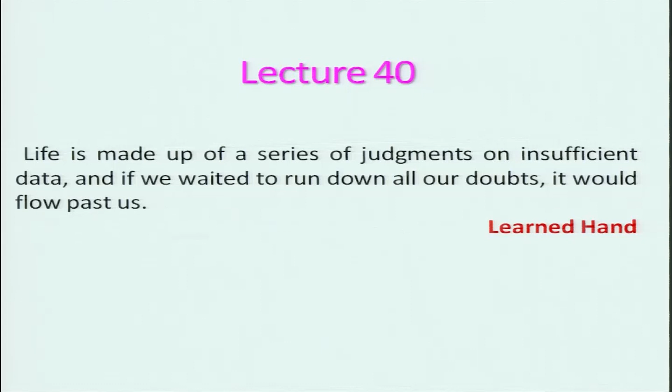So in the last lecture, we basically looked at the governing equations for laminar and two-dimensional unsteady flow, later steady flow, and we looked briefly about boundary layer, though we may not use it much in this course, but you should have some feeling for it. Very importantly, we derived the one-dimensional governing equation for mixture fraction, which is basically a conservative scalar.

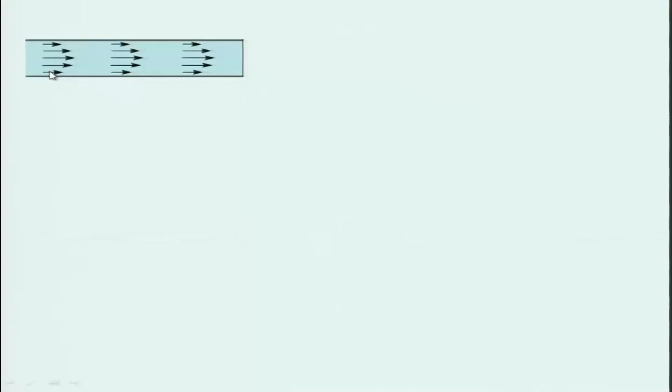These equations are valid basically for laminar flow, and keep in mind we will also have to deal with turbulent flow. Laminar flow means the flow will be layer by layer. If you look at flow through a pipe, it is layer by layer, meaning there will not be any mixing across it. Whereas in turbulent flow, it will not be layer by layer, it will be intermingling with each other.

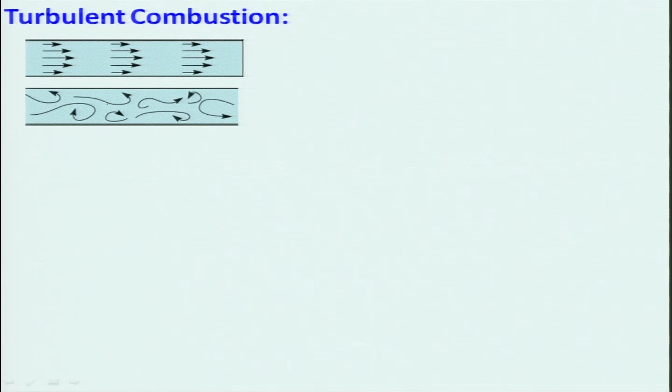So therefore we need to look at that, and turbulent combustion plays a very important role. Why? Because most combustion devices are basically turbulent in nature, except for a few exceptional cases.

For example, if you consider your LPG burner, is it laminar or turbulent combustion? It looks to be laminar. But if you look at a candle light, is it laminar, turbulent, or transition? What would it be? It will not be laminar, it will basically be transition.

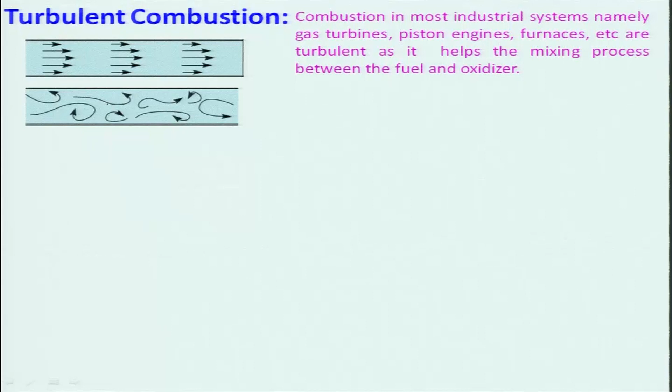But most combustion systems in industries, namely gas turbines, piston engines, furnaces, etc., are turbulent, and it helps in the mixing process between fuel and oxidizer. Why go for turbulent? Not only the mixing, we want a high rate of heat release, meaning mixing should be as fast as possible. Therefore we need to go for turbulent combustion.

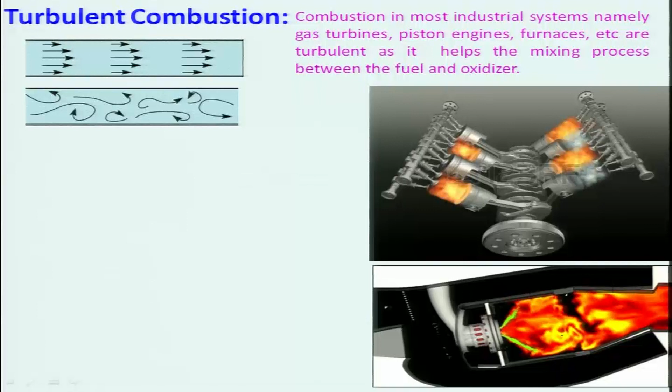If you look at this internal combustion engine, this is the combustion taking place, and it is intensely mixed, meaning the combustion will be turbulent. This is your gas turbine combustor, where a lot of mixing is going on, and there is also some injected fluid like secondary airflow coming in.

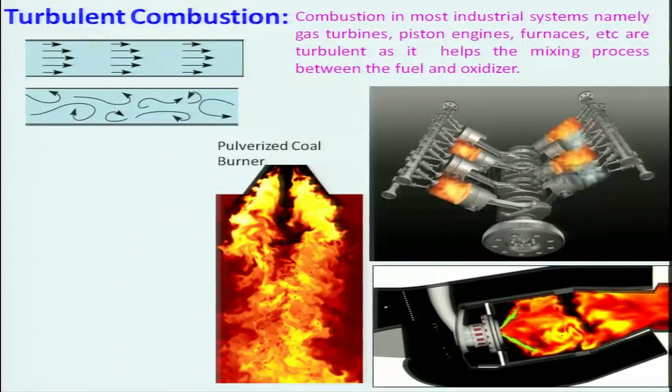Let us look at coal combustion, which is pulverized. Pulverized means particles, and combustion is taking place here. What you could observe is the characteristic feature of turbulent combustion.

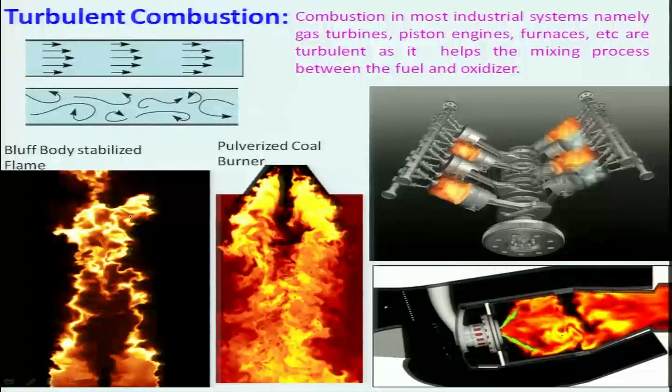What I will do is only touch upon certain terminologies we may use. I will not get into detail on that.

Can we define turbulent flow the way we define laminar flow? How do we do it? There will be some characteristics - the flow will be layer by layer, and then we can say whether it is laminar or turbulent. But can we actually define turbulent flow?

We use viscosity, diffusivity, mass diffusivity or molecular diffusivity, and other properties of the fluid. If I say it is air, the viscosity will be different; if I say water, it will be different. But can we define turbulent flow? You cannot really define turbulent flow - you will have to describe turbulent flow.

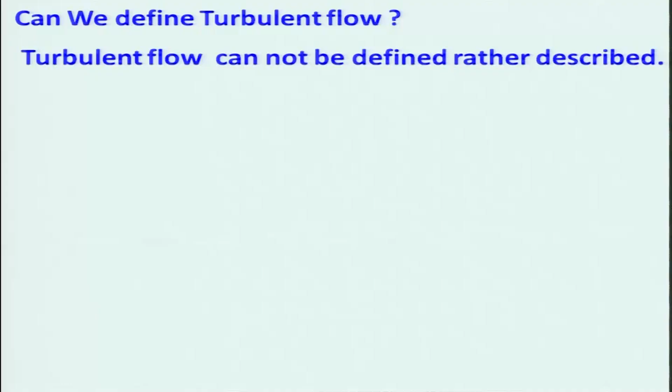And now, how will we describe the turbulent flow? That means we will have to use some characteristics. What are those characteristics? Any idea?

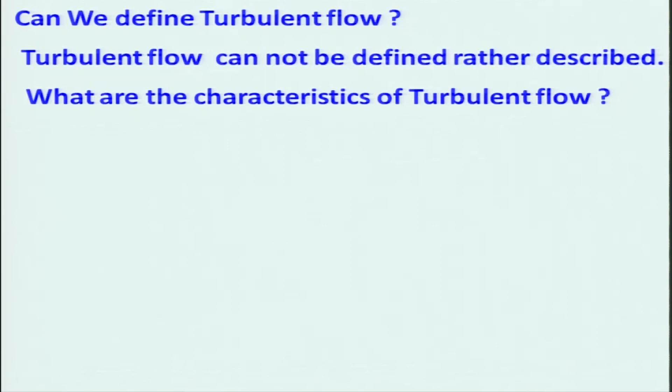It will be irregular, right? The flow will be convoluted, it will be mixing, that means there will be intermingling of the fluid element or the blob which will be taking place, right? The molecules will be moving here and there, and some fluid packets will be moving up and down in the adjacent layer.

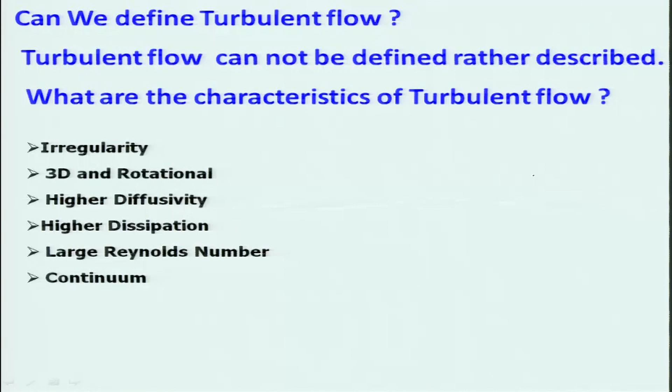And as a result, if I consider a jet, let us say, this is my air jet and there is a flame here. If it is laminar, my flame will be looking like that, some particular shape. But if it is turbulent, it will be like that, intermingling surfaces, and each one of these is an instantaneous contour.

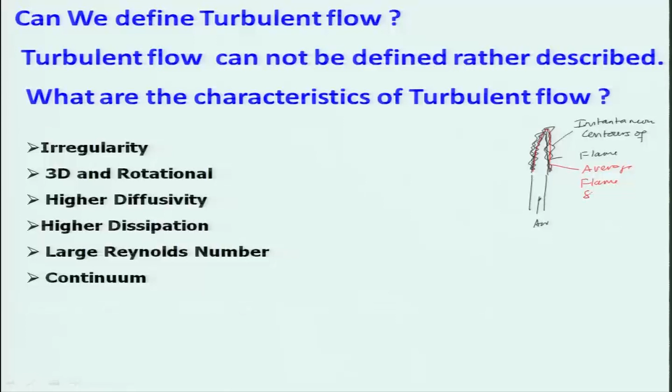Contours of flame. So this will be my average flame surface, right, and these will be very irregular in nature. But if you say, look, I have taken a photograph of the flame and it looks to be very smooth, it is not, because it will be averaging out, you will not see it unless it is highly turbulent.

And this flow will be 3-dimensional in nature. You cannot say I will consider 2D. It will be 3-dimensional and rotational. Rotational means the fluid will be rotating, in the sense, rotational flow - like inviscid flow, is it rotational or irrotational? That will be irrotational, right. But here it will be rotational.

You cannot really consider inviscid, then turbulent. Can you consider? No, no. So as a result, there will be higher diffusivity. What do you mean by that? We have seen various diffusivities like conductivity, thermal conductivity, molecular diffusivity, and viscosity. These are all diffusive processes, diffusivities. So those will be much higher than the molecular one. It will be diffusing, moving around, intervening kind of things.

And of course, we always use a Reynolds number to say whether it is laminar, turbulent, or transition. That is, a high Reynolds number is generally known as the turbulent flow. As we had defined earlier, basically that is Reynolds number, rho V D by mu, if d is the diameter of the tube - this is your diameter, diameter of a tube - from which the flow is going out, both fuel and air mixture you can say.

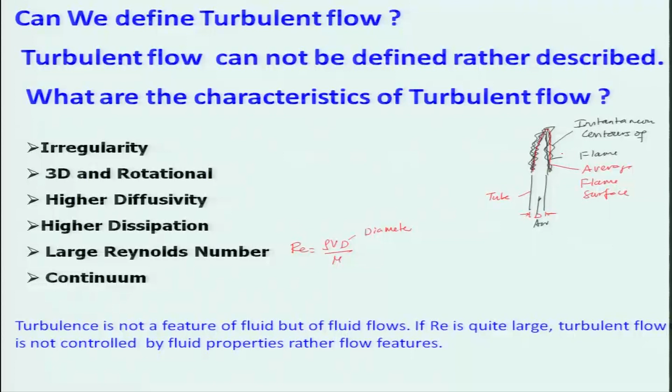Basically, as I told, turbulence is not a feature of the fluid. I have already told, like diffusivity, molecular diffusivity, conductivity, and viscosity - these are all properties of fluid, not properties of the flow. And keep in mind that if the Reynolds number is quite large, not in the transition regime, the turbulent flow is not controlled by the fluid properties, rather by flow features. It will be how the flow is.

And now we will be looking at how we will take care of some of the terminology. I will be talking about it. So, at high Reynolds number, properties like velocities, temperature, and mass fraction exhibit random variations. Now, how will we deal with it?

Because if it is varying randomly, we will have to use some statistical tools or make some average quantities. Keep in mind that eddies move randomly back and forth across the adjacent layer. Let us say there is a bulk fluid which is moving, but in between the fluid elements will also be moving, unlike in laminar flow where the flow moves very nicely.

If you look at turbulent flow, you can look at the traffic in Kalyanpur, Kanpur. All these cars will not be in a lane, they will not be following lane, they will be moving here and there the way they want. But if you go to a western country, the cars will be moving in their own path. So it will be laminar, but here vehicles move here and there.

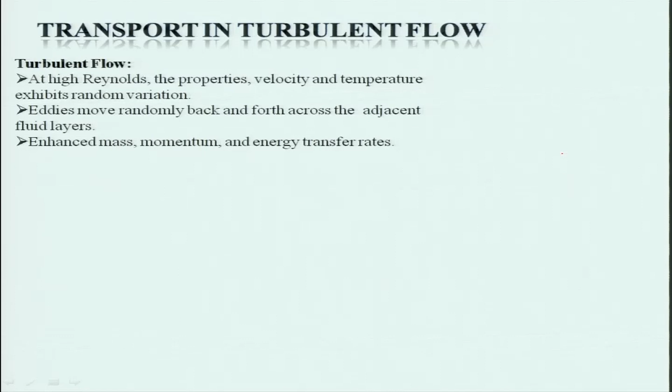So it will be losing a lot of energy, and it will also cause some problems. But as a result of this fluid moving in a turbulent or chaotic way, I can say all turbulent flow is chaotic, but all chaotic flow need not be turbulent. There will be enhancement of mass, momentum and energy transfer rates, and that is why it is being used.

Now let us look at a velocity profile, velocity fluctuation along with time, Vx. This is your average velocity Vx, and this is Vx at any instant of time. If I consider this as a straight line, at T naught, this will be Vx dash at T naught. At some other time instant it will be different. This is the fluctuating quantity, the maximum fluctuating quantity.

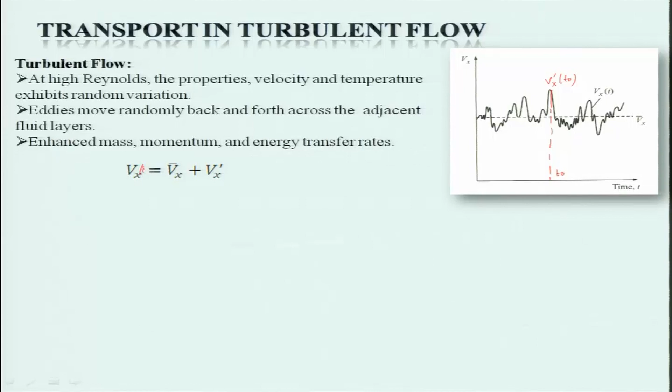That means I can write down Vx at any instant of time is equal to Vx bar, the average velocity along the x direction, plus the fluctuating quantity. So what is this average component?

That is nothing but 1 over delta t, integrated from T1 to T2, of Vx over time dt. If we integrate over a certain time, which is a very large time scale, not a very small one, and should not consider only a small portion but a considerable time, then this gives the average velocity, and of course there will be fluctuating quantities as well.

Similarly, I can also talk about pressure: Pt is equal to P plus P dash. And I can talk about temperature: T is equal to T average plus T dash. Similarly, mass fraction of species i would have its average plus a dash fluctuating term. This is basically known as Reynolds decomposition, having two components, one fluctuating, the other average quantities.

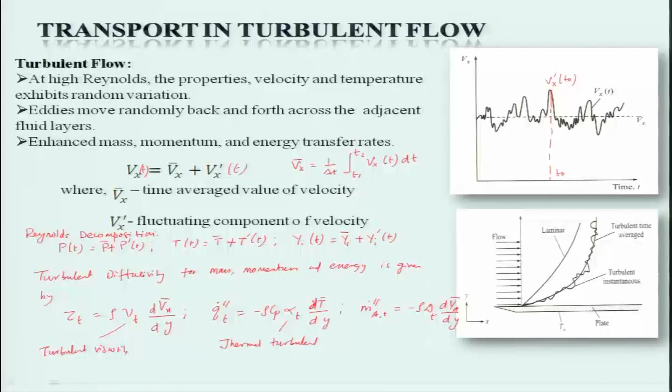And keep in mind that this thermal turbulent diffusivity, or turbulent viscosity, or this turbulent mass diffusivity, are properties of the flow that you will have to connect.

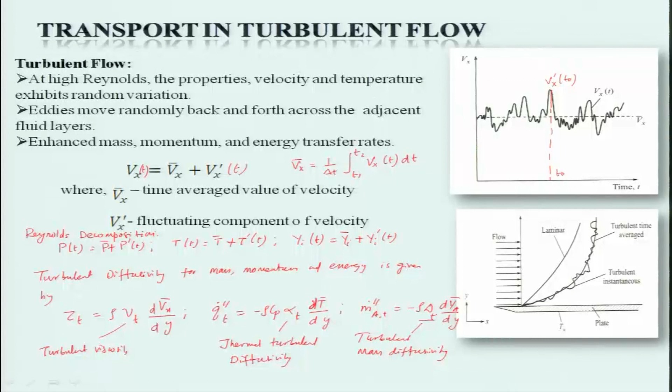We will not be considering this in detail, but let us look at how we can describe these properties using various terms. So turbulent flow can be characterized by two quantities: one is turbulent intensity, and another is the turbulent scale.

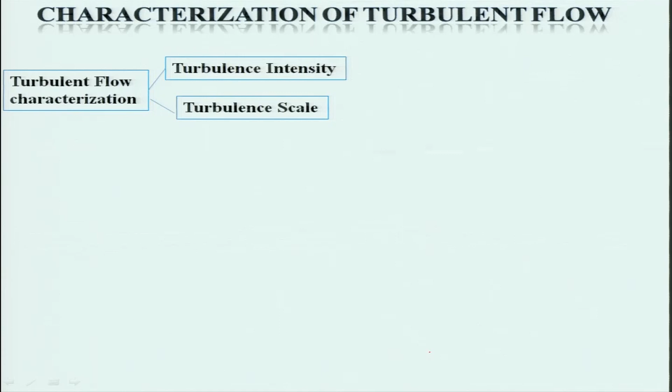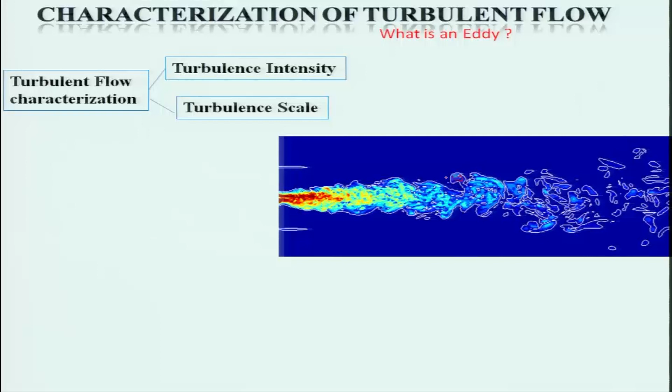So an eddy is considered to be a macroscopic fluid element comprising of smaller eddies as a single unit. That means there will be some small eddies which will be rotating as a unit.

For example, if you look at the various panths in Sanatan Dharma, let us say some group is talking about yoga, somebody is talking about bhakti. They are also having some kind of thing, they will be rotating, moving around it, but they will be similar in nature. So that we call it as eddies.

So that means some fluid element will be moving, let us say in this bulb, I can consider as this one, they will be moving, rotating, intermingling, intertwining, but they will be in a group doing this together, and that is known as an eddy.

And as I told, the vortex embedded in the flow, this is basically a vortex which is embedded in the flow. Vortex means which will be rotating.

And the intensity of the turbulence is basically a measure of the violence of eddies, how fast it is moving, so that energy is transferred. So that is known as turbulence intensity, and turbulent intensity will be dependent on what?

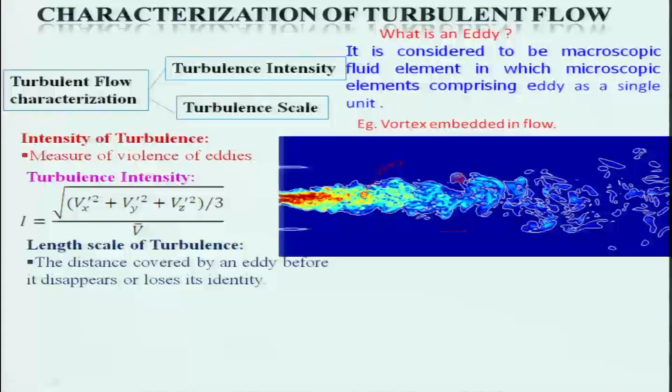Length scale is divided into basically four types. One is macroscopic length scale, which is the characteristic width of a flow. Let us say if it is a pipe flow, what would you use for the macroscopic scale for pipe flow? L will be basically d, the diameter of the pipe.

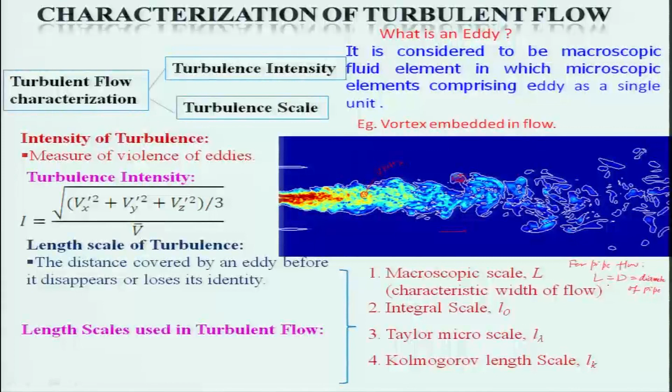And there is the integral scale L naught, and there is the Taylor microscale and Kolmogorov length scale. Keep in mind, mechanically we use this macroscopic scale for laminar flow, we always use rho V D by mu to find out Reynolds number. But in turbulent flow you will be using different scales to find out different kinds of Reynolds number.

Keep in mind that these scales will be changing, because the eddy's size will be changing, and the time and distance it will be moving before losing its identity will also change. So scale will be changing, and there is a cascading effect - larger scale eddies become smaller and smaller. The lowest one will be the Kolmogorov length scale, which is the dissipation scale, because it will be dissipated - the smallest scale is the Kolmogorov microscale.

Let us look at the integral scale. L naught, as I told you, is the integral scale, and this basically represents the distance between two points in a flow where correlation between the fluctuating velocities at two locations ceases - that means there will not be any correlation between them.

For example, if there is a fluid element having some velocity fluctuations, and there is another point at some distance, let's say distance r. This will be moving with velocity Vx dash at position 0, and this will be Vx dash at position r.

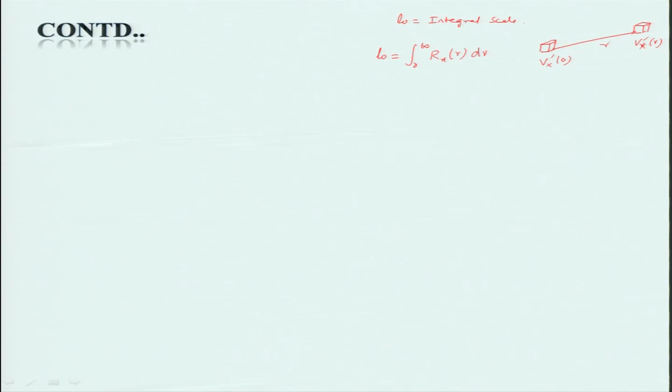That means there will be some correlation between the two, and that distance will tell you the integral scale. So L naught, the integral scale, can be written as the integral from 0 to infinity of Rx r dr, where Rx is the correlation coefficient.

As I told you, this is basically a function of the distance between which the velocity fluctuation loses its identity. So I can define Rx: it is Vx dash at time R equals 0 and Vx dash at R, averaged over both, divided by Vx RMS dash at 0 and Vx RMS dash at R. This is the correlation coefficient which you need to look at to define the integral length scale.

Similarly, in another way, we can talk about the Taylor microscale, L lambda, which is nothing but Vx dash RMS divided by the average of (dou Vx by dou x) squared, known as the mean strain rate - this divided gives you the Taylor microscale.

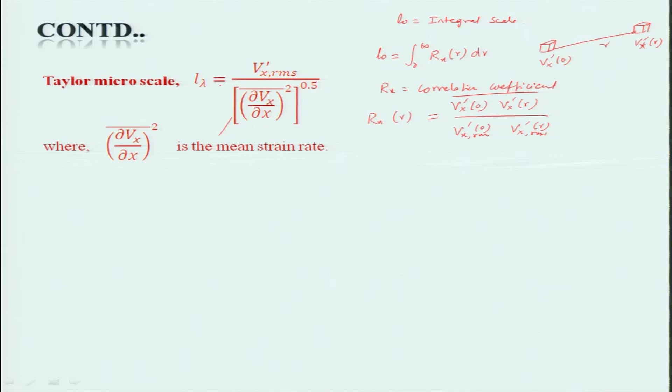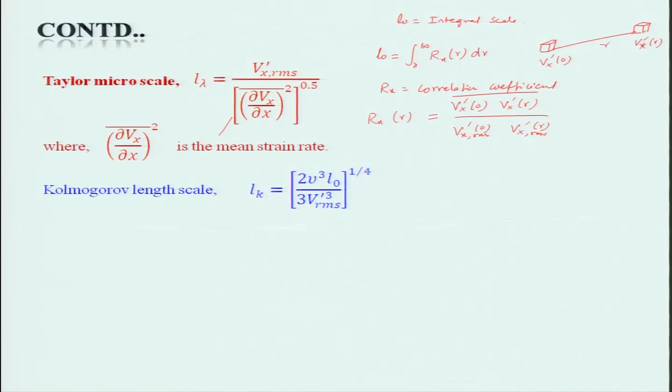And the Kolmogorov scale is given by 2 nu cubed L naught divided by 3 V RMS cubed, all to the power 1 by 4 - this comes from order of magnitude analysis, and is related to the integral length scale L naught and V RMS, where nu is the kinematic viscosity. And Lk, as I told, is the smallest vortex that could be present in the turbulent flow.

After that, what will happen? It will be dissipated - it will lose its identity altogether. That means all the energy carried by this vortex will be lost. These are all packets of energy carried by the vortex, which we call an eddy.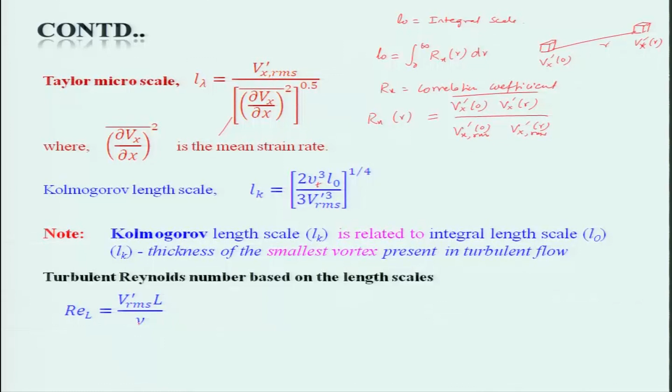Now, based on this, you can define various kinds of Reynolds numbers based on these scales. The turbulent Reynolds number based on the length scales is RE L, based on macroscopic scales, given by V RMS L divided by nu - this is what we generally call Reynolds number in laminar flow. But in turbulent flow, depending on the situation, we use the Reynolds number based on the integral scale.

The only difference is that you are using L naught and V dash RMS. RE Lambda is nothing but V dash RMS times L lambda divided by nu, and RE LK is nothing but V dash RMS times LK divided by nu. Keep in mind that V RMS is the characteristic velocity in turbulent flow that we consider, the characteristic root mean square velocity.

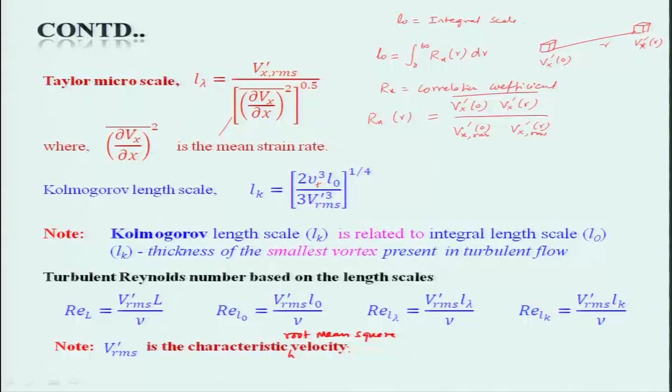So with this brief introduction about turbulent flow, I will stop here. In the next lecture we will be discussing combustion. Keep in mind that we will need to look at some of these terminologies when we go into turbulent premixed flames. Thank you very much.